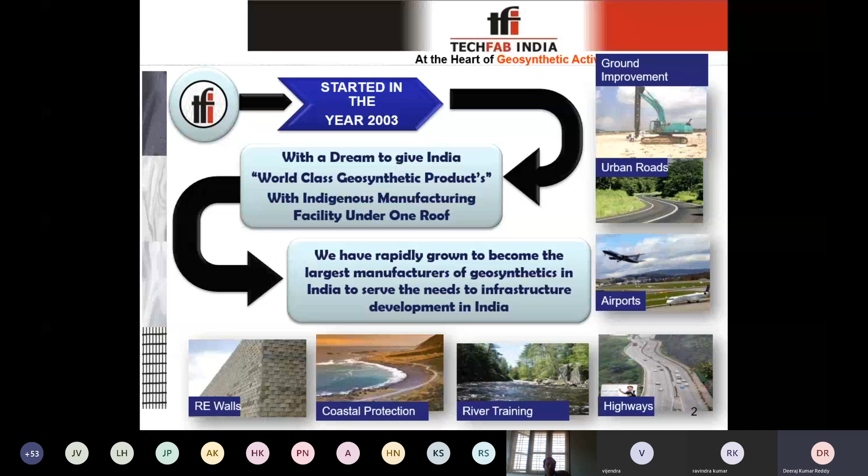I am proud to say that TechFab India has been awarded the best geosynthetics manufacturer of the year 2018. This circular shown here is a screenshot issued by MORTH, where TechFab India has been mentioned as the leading manufacturer of all geosynthetic products in India.

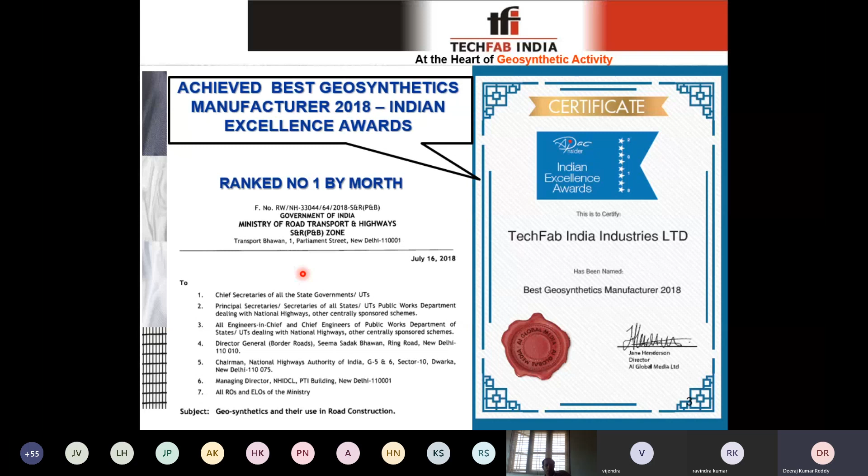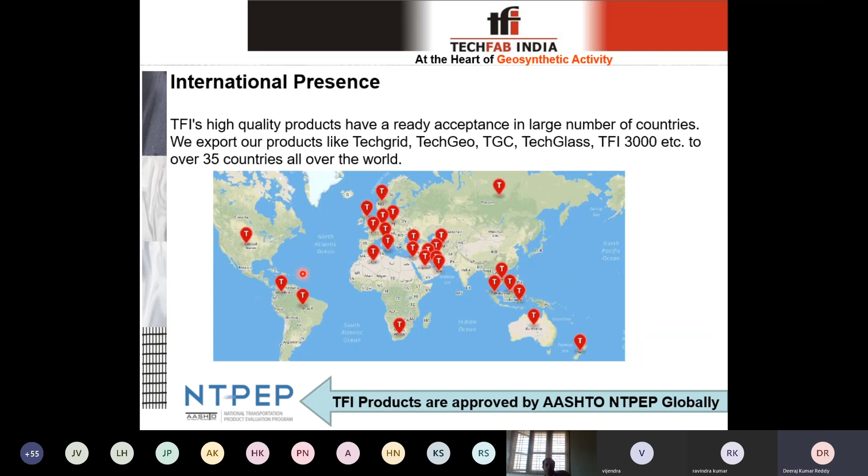I'd also like to remind everyone that we have an international presence. We are exporting geosynthetic materials abroad to 35 countries, and our geosynthetic products are approved by AASHTO and NTPEP globally. So to proceed with today's topic...

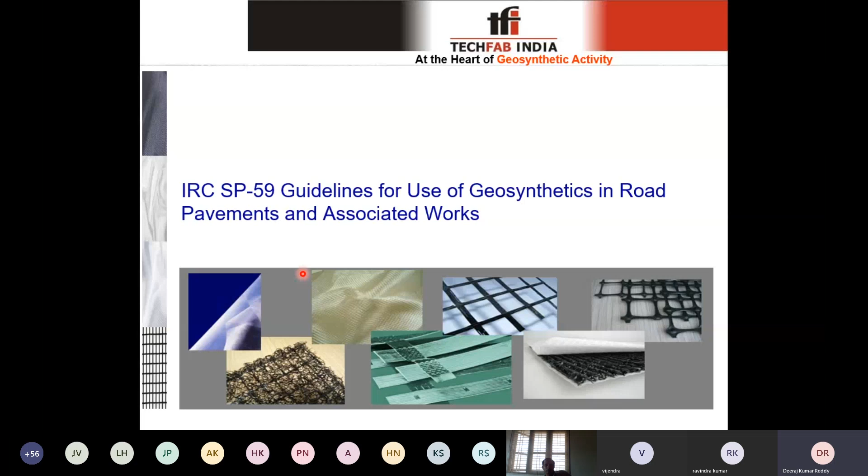GeoGrid reinforced flexible pavements with reference to IRC SP 59. This IRC SP 59 is the guidelines for use of geosynthetics in road pavements and associated works. Though we are exclusively discussing GeoGrid reinforced pavements, I will first give a brief explanation of the mechanism and different types of functions of geosynthetics used in road pavements or embankments, and then proceed with the exclusive design for GeoGrid reinforced pavements.

To start with the functions of geosynthetics, first is the separation function. This applies when you have two kinds of soil—for example, clay soil and a good quality embankment fill to be placed on the clay soil. There is every chance these two soils get mixed over a period of time, which may alter the performance of the embankment or pavement.

To prevent that, a geotextile can be laid between the two layers—between the good quality and bad quality soil—which will prevent the intermixing of these two soils. This separation function is served by non-woven geotextile.

Next is drainage. Drainage is the collection of subsurface water and discharging it into the desired destination. This drainage function is served by a drainage composite.

Next is filtration. Similar to separation, the non-woven geotextile also performs the filtration function—it allows water to pass through while retaining soil particles. That is, just as it prevents the two soils from mixing, it does not prevent water from passing through the different layers; the water passes while the soil is retained.

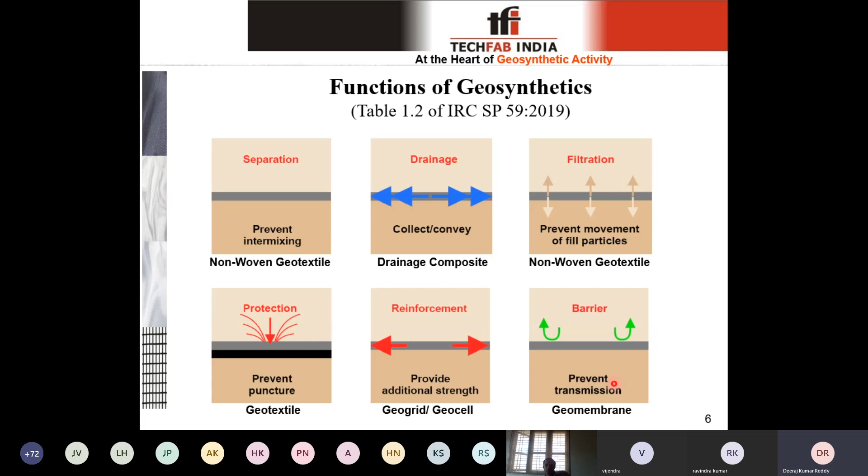Next is the barrier function. Barrier is the prevention of transmission of any kind of material, be it soil or water. In separation or filtration, water is allowed to pass through, but in the case of a barrier, even water will not pass. Especially in cases of capillary rise issues, a geomembrane is used to prevent the capillary rise and prevent water from passing through.

When we talk about geosynthetics in pavements, especially these geosynthetic solutions are well established with all codal provisions, and they are used as an alternative to conventional solutions. The major objective of using this solution is to optimize the cost of a project and to reduce the usage of natural resources like aggregates or good quality aggregates.

Now, when we talk about basic applications of geosynthetics in pavements, to start from the bottom, that is subgrade separation and stabilization. Next is the base reinforcement, that is reinforcing the base layers of the pavement. Next is overlay stress absorption, that is the reinforcement which we use in the overlays in the bituminous layers to prevent reflective cracking. Next is subsurface drainage, that is drainage to be provided in the pavement layers or in the embankment of the road to collect the subsurface water and discharge it out. I'll explain all these applications one by one in a slide.

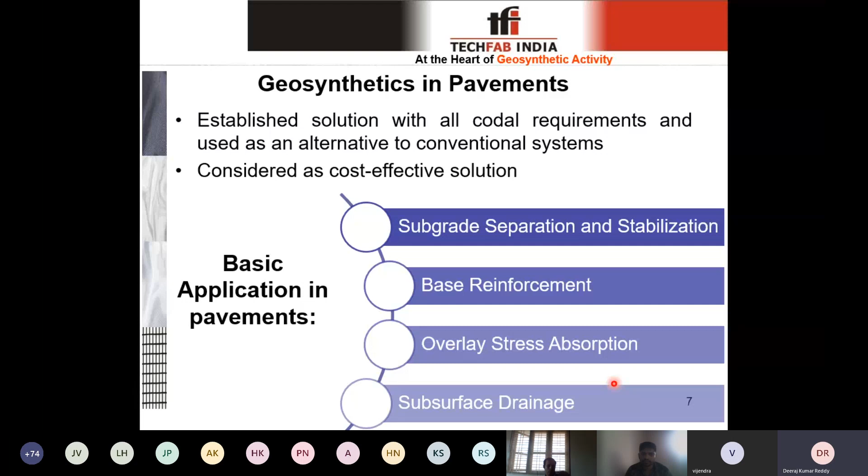To start with separation and filtration function, when you have two soils - one is the embankment fill, which we consider a good quality soil, and a clay, maybe a black cotton soil - we do not want to mix these two soils, because above this we are building an embankment, and over a period of time, if these two soils get mixed, the properties of your embankment fill itself will change, and that may alter the performance or the stability of your embankment.

So in order to prevent that, when we lay a non-woven geotextile separation layer or filtration layer, this layer will prevent the mixing of two soils, and this will allow the water to pass through between the two layers, with which your pore water pressure will not be developed at any layer of the embankment or the ground, and your soils are also not getting mixed. So this is how your separation and filtration function will perform.

Below is the picture of one of the projects where a non-woven geotextile is currently being used. This is the project which is under execution now, where your geotextile is being used to separate and filter before laying the embankment fill.

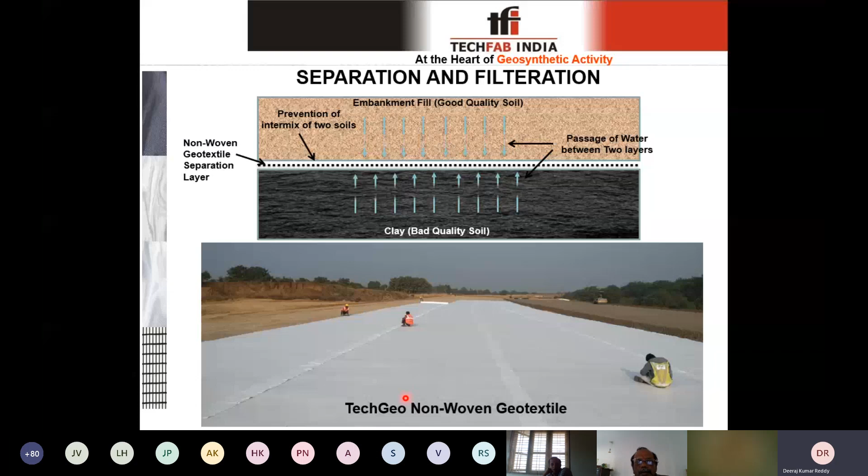Next is the ground improvement. Here I am talking about ground improvement with geocell. This geocell is a honeycomb structure in the form of cells, in which you will fill the geocell with soil or aggregate, and the soil or aggregate in the cells will have the confining effect from all the sides, as shown in the animation.

So when your load is coming from the superstructure or from the traffic vehicles, these loads will be transferred onto the geocell, which is in the embankment at a particular angle. So when it reaches the geocell, due to its confining pressure and stresses developed laterally, this will act as a beam, and it will transfer the loads to the wider areas.

With this, when we reach the ground level, there will be minimized pressures on the existing poor ground. That means there is a difference between the loads that are coming onto the ground with geocell and without geocell. So this is how your geocell is minimizing the pressures or the loads coming onto the poor ground.

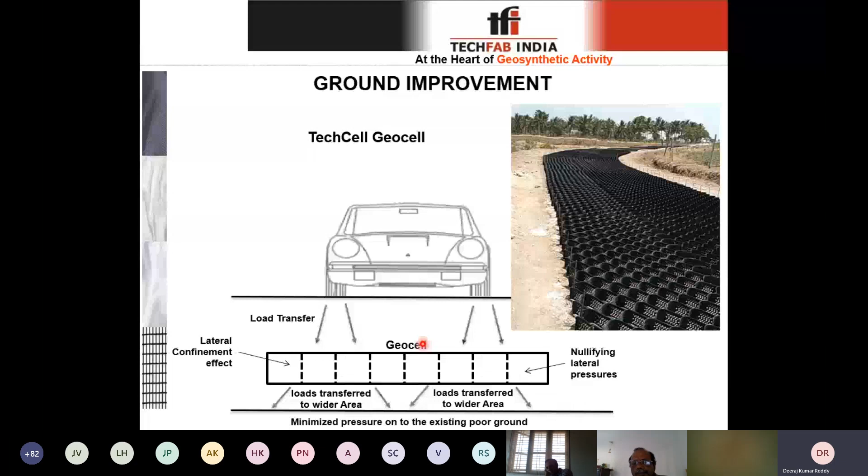Next is the subsurface drainage. Conventionally we use gravel or sand as drainage medium in the embankment, or in case of pavements, it is your GSB layer that will act as a drainage layer.

Now, when we talk about the alternate solution, it is a drainage composite which will have two sides non-woven geotextile - the same geotextile used in separation or filtration functions. There will be two geotextiles from bottom and top, and in between there will be a drainage core. Water will pass through this geotextile and be collected into this core, which will help discharge water to the desired discharge points. This is how your drainage composite will function.

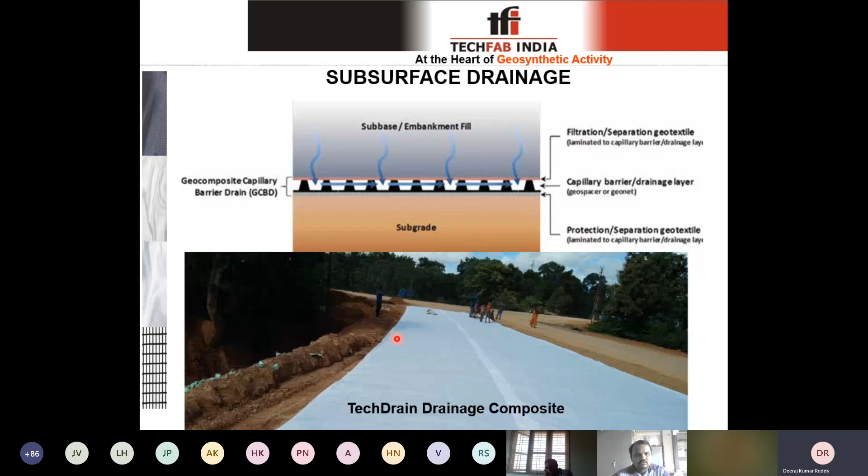The next function is overlay stabilization. This involves using an asphalt interlayer composite made up of glass fibers at the overlay location. That is, when you have an old pavement which is already distressed and you need to lay a new layer of overlay, over time the cracks already present in the old pavement, due to the mechanism of reflective cracking, will propagate upward.

And the overlay which you lay will be of no use after some time. So to prevent this reflective cracking, if you lay an interlayer with asphalt interlayer composite made of glass fibers, this layer will prevent the propagation of cracks to the upper layers, and with this the life of the overlay will be increased.

This is especially useful in case of road maintenance works. For example, let's say a contractor has a road maintenance contract for 20 years. During those 20 years, if a contractor conventionally has to do the overlay maybe 4 or 5 times, with the use of this interlayer he can minimize the number of overlays and reduce the maintenance cost.

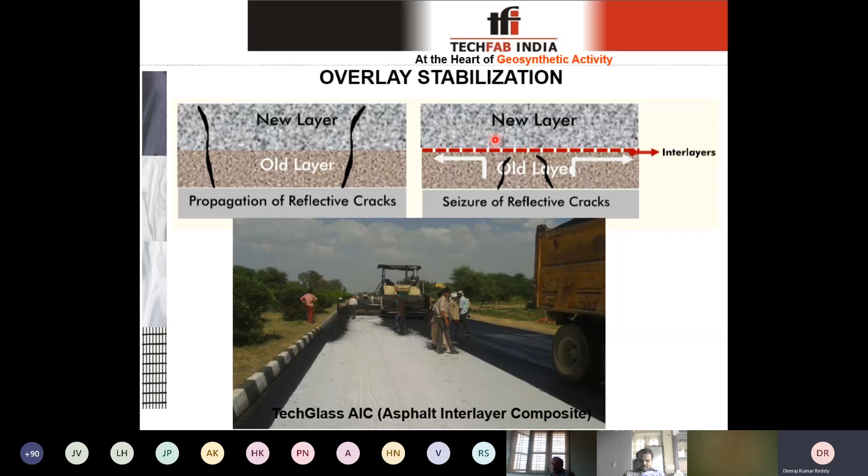Now moving ahead to base reinforcement in flexible pavements using biaxial geogrids, which is our topic for today. Regarding other applications, if you have any queries, we will discuss them in detail, as the topic of today's session is exclusively for base reinforcement using a geogrid.

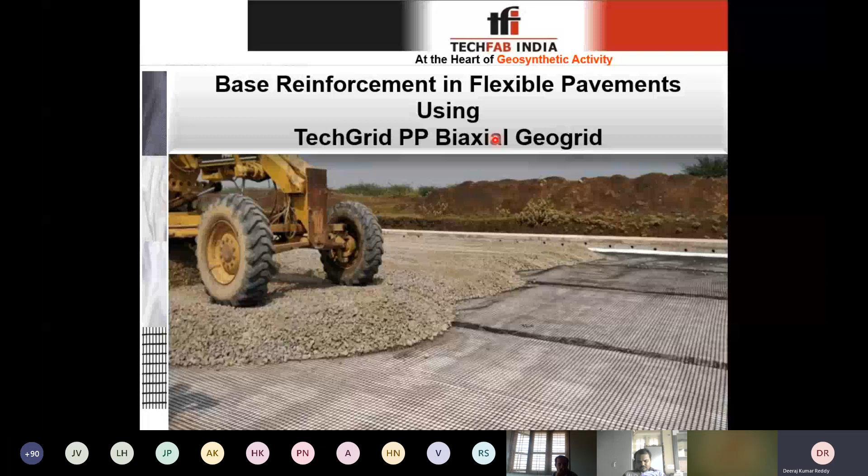Now, when we talk about geogrid reinforced flexible pavements, these solutions are in line with the initiatives of MORTH and NHAI through their circulars to adopt reinforced pavements, which aims to minimize the usage of natural aggregates and thereby reduce the carbon footprint on the environment.

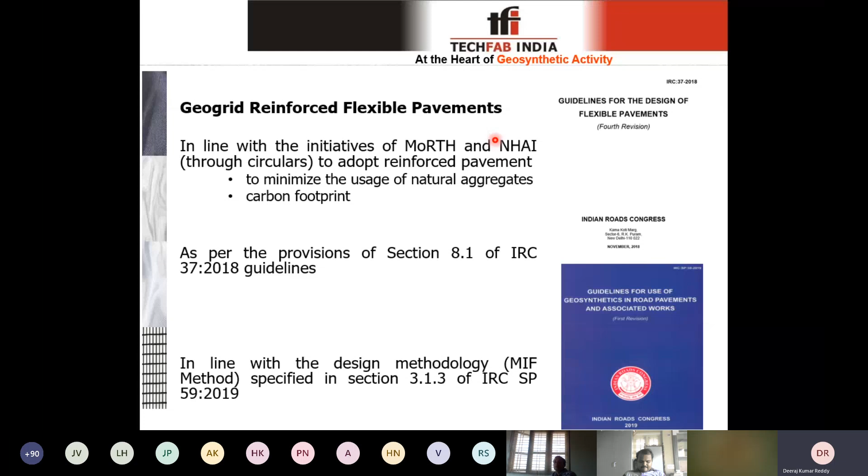These geogrid reinforced flexible pavements are as per the provisions of section 8.1 of IRC 37 2018, the latest guidelines of IRC 37. In continuation to IRC 37, the detailed design methodology and applications of geosynthetics in road pavements are specified in IRC SP 59 also. These two codes are the latest guidelines, released in 2018 and 2019.

And as I said, there are many types of geogrids like uniaxial geogrid or biaxial geogrid. Even in biaxial geogrid, you have extruded geogrids, etc. Now, why we use PP biaxial extruded geogrid for pavement applications is the unique structure that allows the grid to get a good grip on the aggregate particles and results in effective mechanical interlock.

So this is how your geogrid will improve the stiffness of your aggregate layer, and when stiffness increases in the aggregate layer, automatically the modulus value of that particular layer, that is the strength of that layer, will get improved, and the improved strength will be used to analyze the pavement.

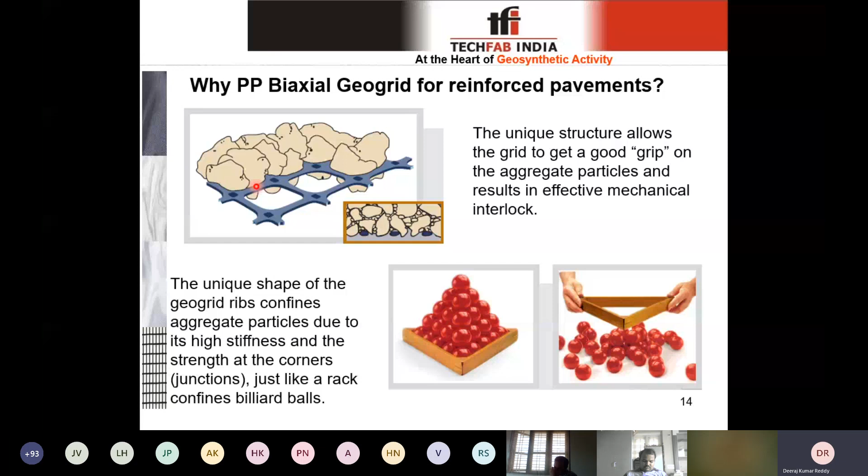So when we talk about the benefits of PP biaxial geogrids in pavements, we have three kinds of benefits. That is three alternatives we can see in the pavements.

One is reduction of thickness. When you have the same kind of situation as conventional pavements, you can reduce the thickness of your pavement layers, either the base layer or the sub-base layer, and get the direct cost benefit of the reinforced pavement. Second is increasing the design life.

For example, in the initial stage of the project, you have analyzed the traffic to be maybe 50 MSA loading onto the road pavement. By the time the contractor executes the work, the loading gets increased to 75 MSA due to various reasons. So during that time, conventionally what contractors or consultants have to do is increase the thickness of pavement and make it suitable for 75 MSA instead of the older 50 MSA.

During that time, there is an alternative: using the PP biaxial geogrids. As you are improving the strength of your pavement layers, automatically your design rutting and fatigue lives, for which we design the pavements, get improved, and the same thickness or very minimal increase in thickness will make that pavement composition suitable for 75 MSA also. This is just an example of how increase in design life is possible.

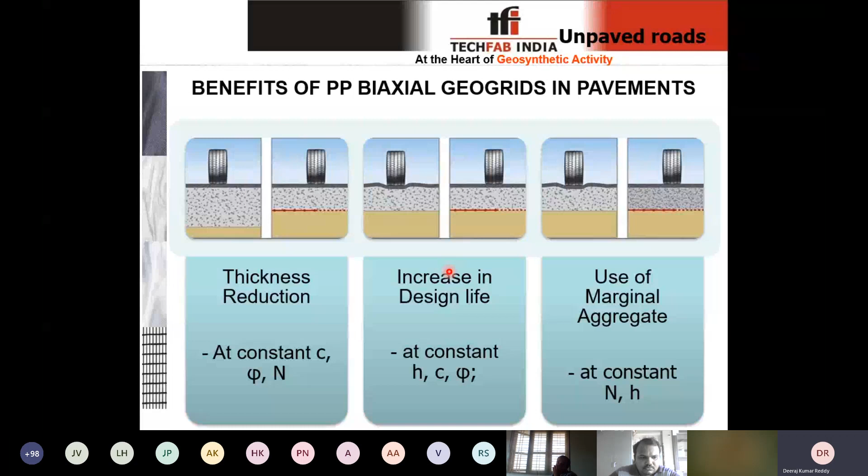Now, when we talk about the design methodology, in IRC SP 59 or the IRC 37 guidelines, they have specified two methods: one is the layer coefficient ratio method, that is the LCR method, or the modulus improvement factor method, that is the MIF method. In this presentation, I'll exclusively talk about the modulus improvement factor method, the MIF method, which is a very simple method compared to the LCR method.

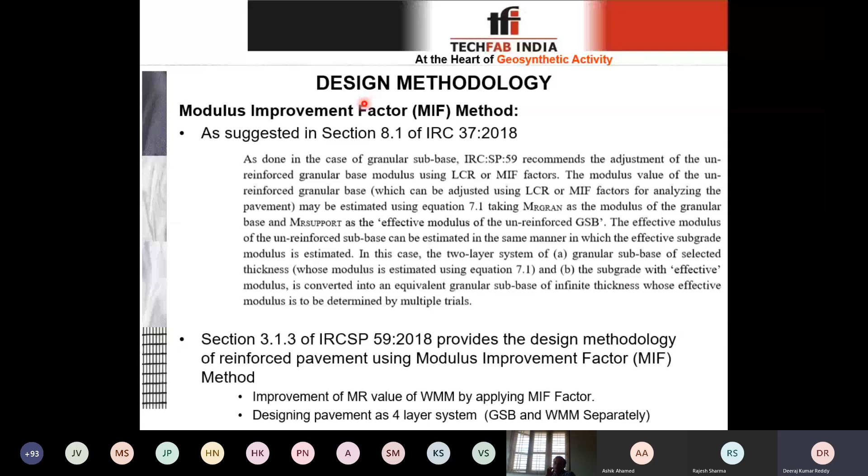But when you come to reinforced pavement, you are including a reinforcement in any one layer, either base or sub-base. So you cannot consider both base and sub-base layers as the same and design in this case, because you are changing the characteristics of one particular layer. That is why IRC 37 or IRC SP 59 says that for reinforced pavements, you need to consider four layers: BC plus DBM combined as one layer, WMM separately as base layer, sub-base separately as one layer, and subgrade as one layer. This is how IRC 37 recommends designing reinforced pavements.

So the step-by-step procedure for the design methodology is: first, determine the effective CBR of the subgrade. IRC 37 recommends the procedure for determining the effective CBR. You have the existing subgrade or existing soil with a certain CBR. Above that, you compact 500 mm thick good quality soil having a CBR of more than 8%. The combined or effective CBR of these two layers is used for the design of the pavement. This is the step of determining the effective CBR.

Once your effective CBR is determined, you will consider some trial thickness of the reinforced pavement. Basically, these pavement designs are totally based on the trial and error method. You consider a certain thickness of pavement and check it for fatigue and rutting strains.

If they are safe, you adopt it. If they are not safe, you improve or you increase the thickness. That is how you design the pavement.

So the same way here we will consider trial thickness of reinforced pavement, and then you determine the modulus values, that is resilient modulus of each layer: subgrade, GSB, WMM and BC and DBM combined. As I said in the earlier slide, here we are considering individual layers, and IRC 37 gives one formula for determining the modulus of granular layers. I'll explain that in the next slide.

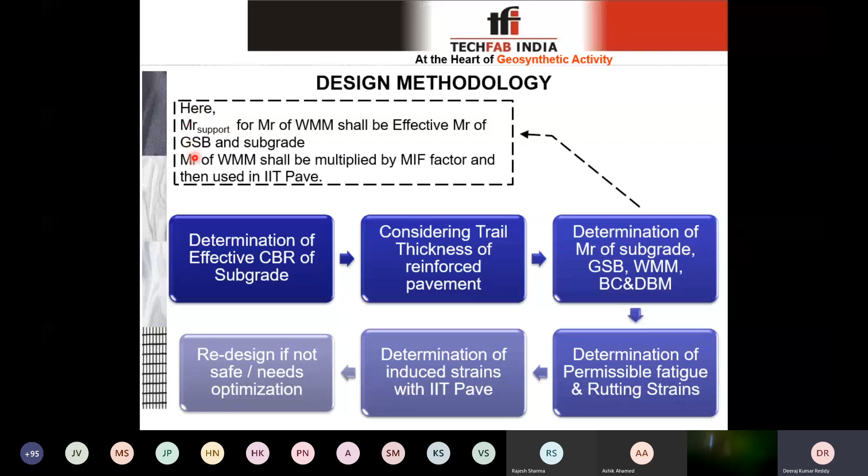Now I have told about determination of MR values. So when we talk about the resilient modulus values, that is the strength characteristic of each layer of pavement, starting from the subgrade, depending on the effective CBR of the subgrade, we will determine the MR value.

And then when we talk about the resilient modulus of GSB, that is the layer above the subgrade, this is the formula that IRC 37 gives, which is dependent on the thickness of your GSB and the MR of your underlying layer, that is the subgrade layer. With this, you will determine the resilient modulus of GSB.

Now when we talk about the WMM, the same formula will apply, and here H will be the thickness of your WMM layer, and MR will be the MR of the supporting layer. Here the supporting layer is GSB only, but you should not take the MR of GSB directly. Instead, you should evaluate the effective CBR, effective MR of this GSB and the subgrade soil.

This is because the stresses induced onto the WMM layer will be transferred to the subgrade also. So to evaluate the strength, you should not consider only GSB as the support for WMM. Your subgrade is also the support. So with this, you will determine the MR of support first, which is the effective value of your GSB and subgrade, and using this MR you will determine the MR of WMM.

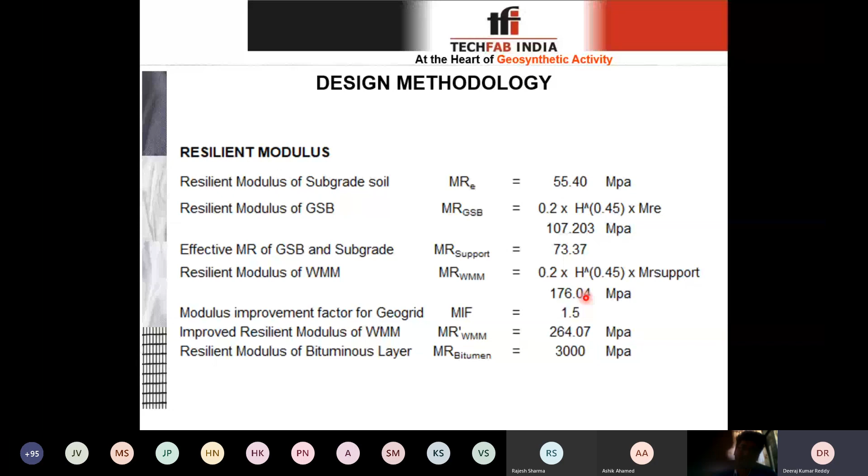When we talk about the cost comparison in this particular case, on an average, you will be able to save directly 10% cost of your pavement.

This cost saving will be further improved if your CBR is going down. That means as your CBR goes down, your improvement factors get higher, and higher improvement factors lead to higher cost savings, because at very low CBRs, the conventional thickness of your pavement is very high.

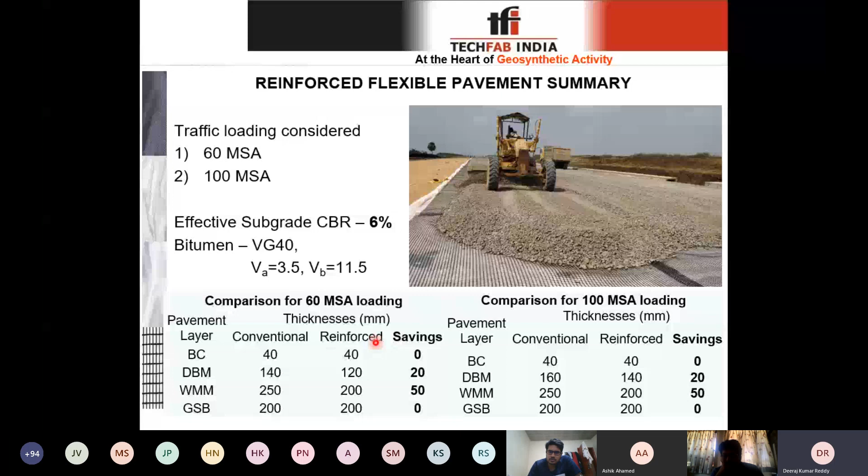I am not talking about the cost analysis here, because this varies for each project depending on the cost of your pavement layers and the location of the project. If a particular project needs a cost analysis, you can come back to us. We will provide you the designs for these GeoGrid reinforced pavements, and you can analyze them with your project's cost.

Now, regarding the compliance of these biaxial geogrids, the technical specifications for mechanical and endurance properties are specified in section 700 of MORTH, that is table 700-7 of MORTH specifications. The same table is also given in IRC SP 59, and this is the extract of IRC SP 59 which I have placed here. The same table is there in MORTH also.

The predominant factors in this table are the tensile strengths at 2% and 5% strains. Generally, in regular geogrid reinforcements, you consider the ultimate tensile strength or long-term design strength of your reinforcement. But in this case, since you need stiffer geogrids, the predominant factors are the strengths at very low strains, that is 2% and 5% strains.

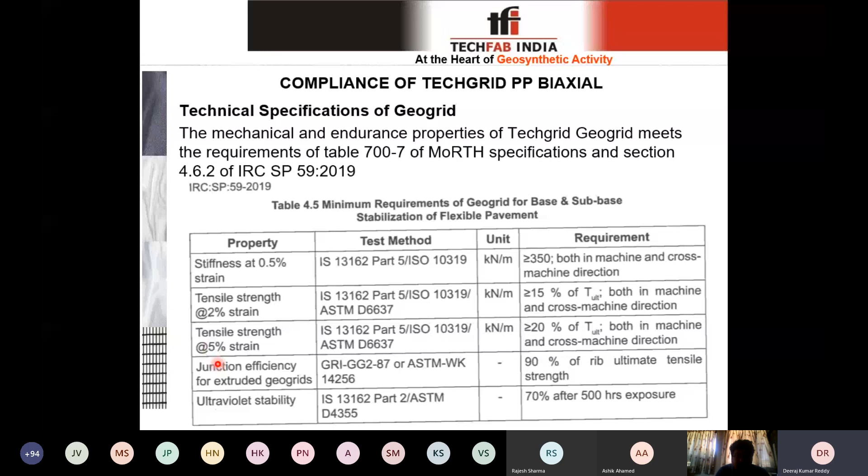Next is the junction efficiency of extruded geogrids. MORTH or IRC specifies that these junctions should have a minimum 90% strength of your ribs, that is the tensile strength of your geogrid. Conventional geogrids used in reinforced soil walls or embankment stabilizations do not have this junction efficiency, because their function in that application is different from pavement reinforcement.

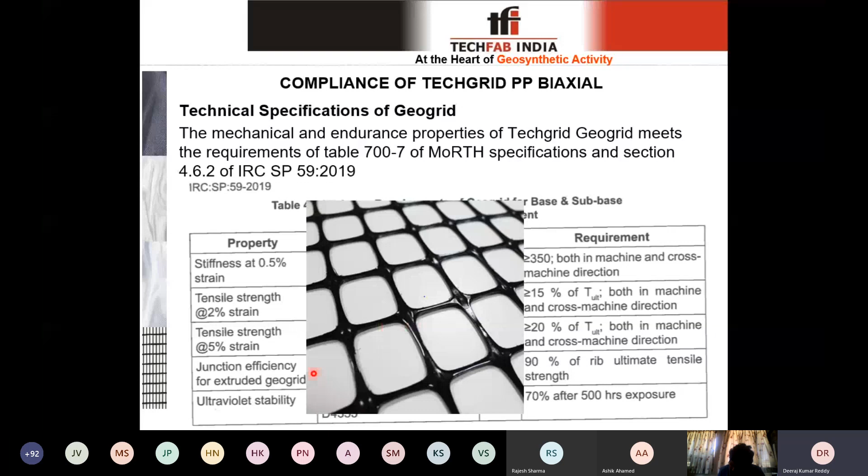Next is ultraviolet stability, which is one of the endurance properties of the geogrid. Sometimes when incorporating this solution at the DPR stage, consultants preparing the DPRs require SORs supporting the geogrids so the same can be incorporated in the DPRs. This biaxial geogrid is included in Maharashtra SOR and Delhi schedule of rates; these are the extracts of that particular item from Maharashtra SOR and CPWD SOR of Delhi.

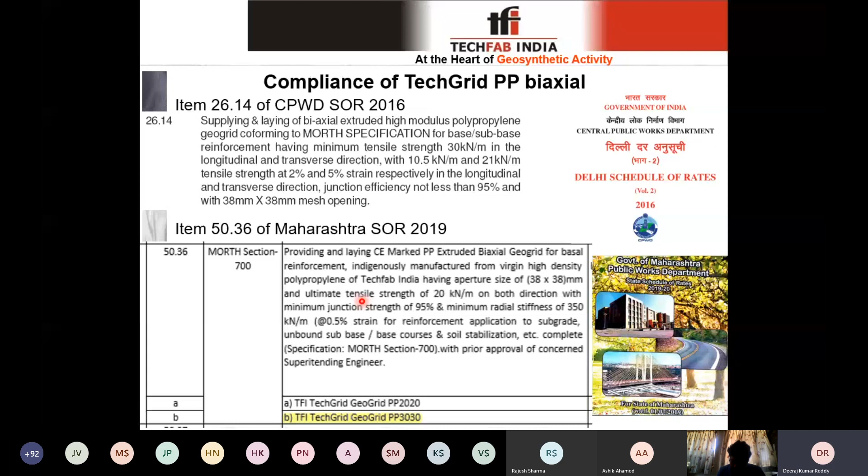Regarding the product testing.

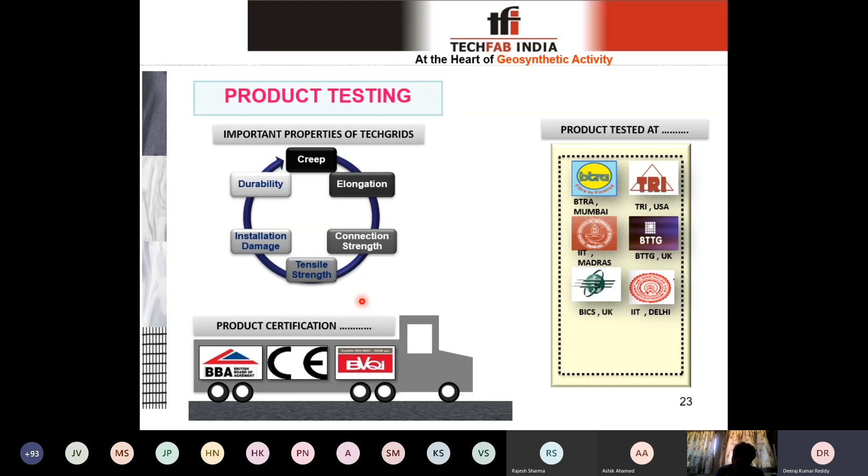Techfab India's products are in-house tested with GAI-LAP and NABL accreditation of all our laboratories with ISO 9001:2015 certification. We have also tested our products at various IITs, and at Bombay Textile Research Association in Mumbai. For export purposes, we have accreditations from TRI from USA, BTTG from UK, and BICS from UK. These are our product certifications for the technical specification of the product.

When we go to the installation procedure of the geogrids in pavements, first is unrolling of the biaxial geogrids. These geogrids come in rolls. First step is to unroll at the desired location as per the markings. Second, when unrolling the adjacent rolls, these geogrids come in approximately 4-meter width rolls, covering 1 lane width, and you lay the adjacent rolls ensuring an overlap of 100 to 150 mm.

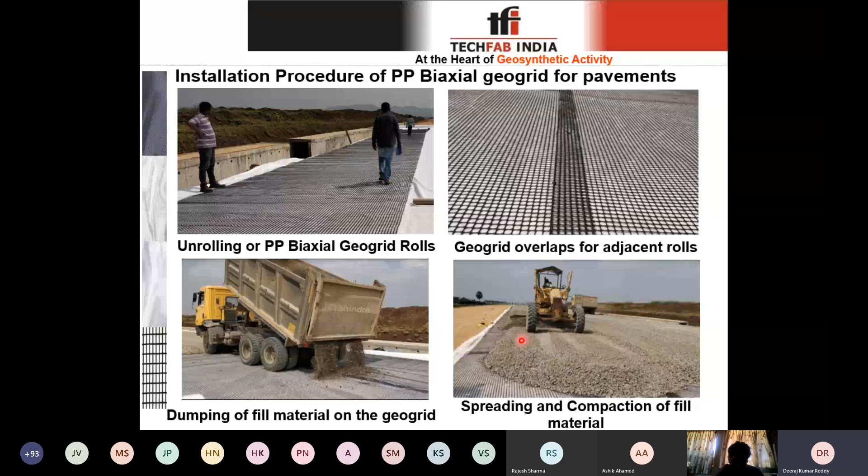Once the geogrids are unrolled, we start dumping the fill material on the geogrid, which is then spread and compacted as per the desired thickness. This is the installation procedure for the geogrids. You do not need any specialized equipment or machinery to install these geogrids—it's the regular machinery used at pavement construction.

More than 10 lakh square meters of biaxial geogrids we supplied last year in various highway projects in Gujarat itself. Apart from these, Techfab India has totally supplied around 30 lakh square meters of geogrid for various state, national highways and PMGSY routes. This has drastically improved after the publishing of IRC codes like IRC 37 or IRC SP 59.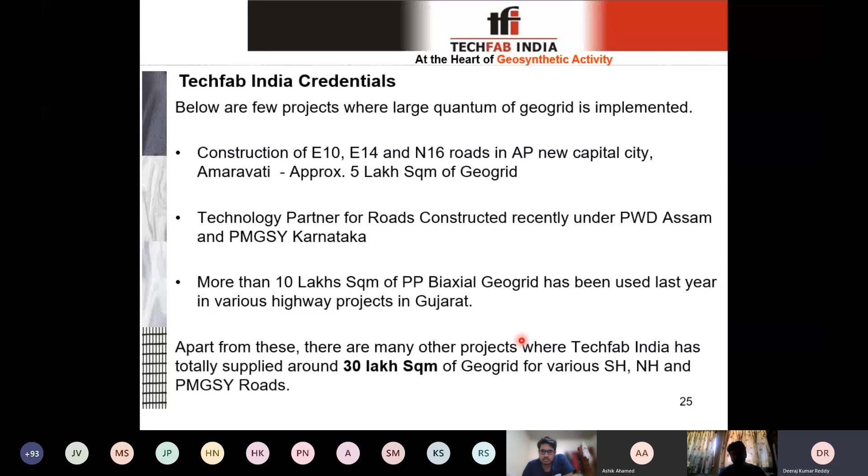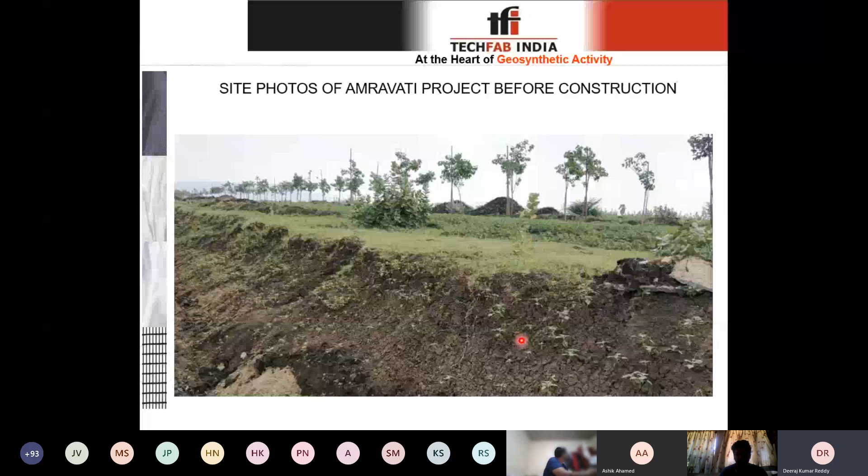These are some site photographs of the Amravati project which I just discussed. This is the photograph of the site before construction. Here you can see it is purely black cotton soil, a very weak soil underlying the pavement, which was excavated to the desired levels of the pavement. And these are the rolls of the geogrid.

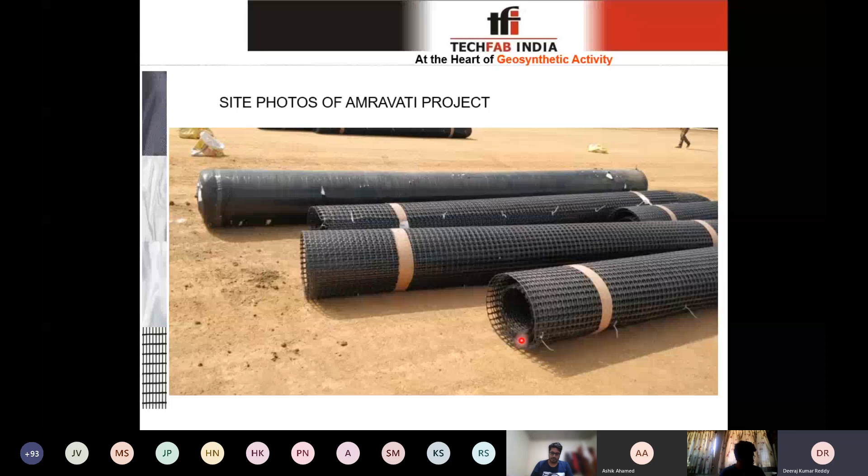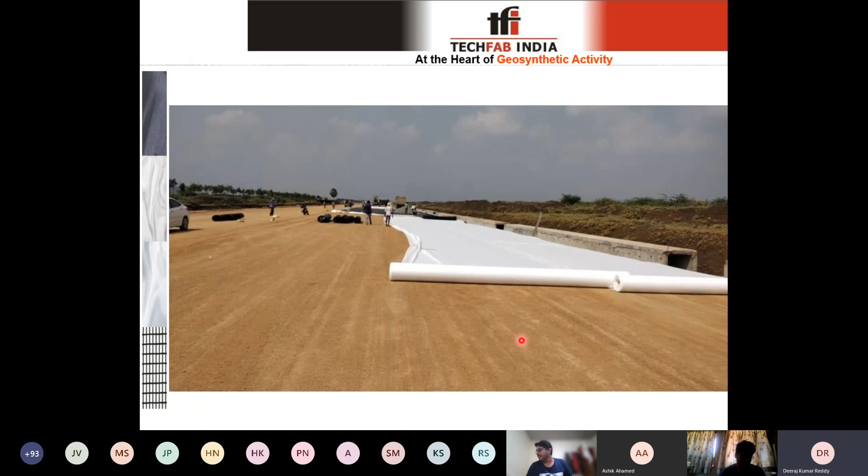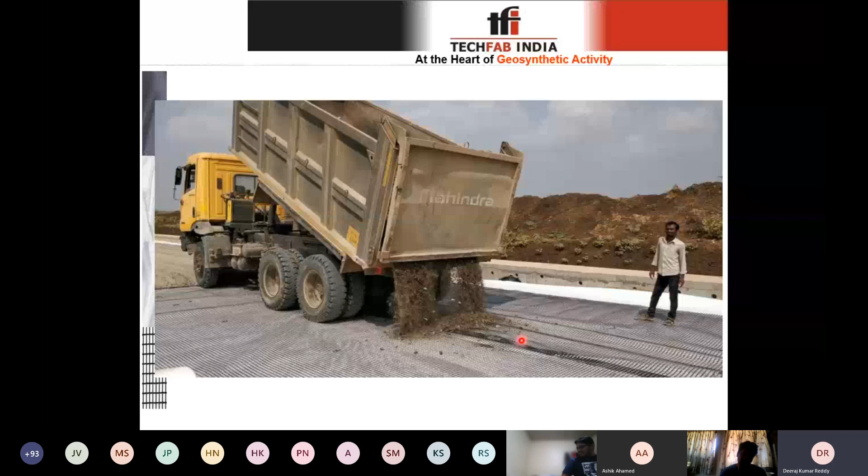Here, as the objective was also to separate the layers, they used geotextile apart from the geogrid. This geotextile was used as a separation and filtration layer. So this is unrolling the geogrid, this is the overlap for the adjacent rolls, then the dumping process, then spreading and compaction of the aggregate layers.

To conclude, reinforced flexible pavements are technically superior and economical compared to other conventional flexible pavements. These geogrid reinforced flexible pavements comply with initiatives of NHAI towards minimizing use of natural aggregates and reducing carbon footprint on the environment. The design methodologies and material specifications are included in IRC and MORTH standards and various SORs also.

TechGrid PP biaxial geogrids—the improvement factors, which is the most crucial thing in design of reinforced pavements—have been certified by IIT, and the technical parameters of the geogrid have been certified by Bombay Textile Research Association, that is BTRA. TechFab India, complying with the Make in India initiative of the Government of India, manufactures all geosynthetic products from geotextile to geogrid, geocells, etc. in India only under one roof, with the highest manufacturing capacities to supply huge quantities in very short periods as per project requirements.

We have ISO 9001:2015 certification, and all our manufacturing and testing labs have NABL and GAI-LAP certifications. We provide engineering and techno-commercial assistance to all stakeholders, right from the inception of the project to completion.

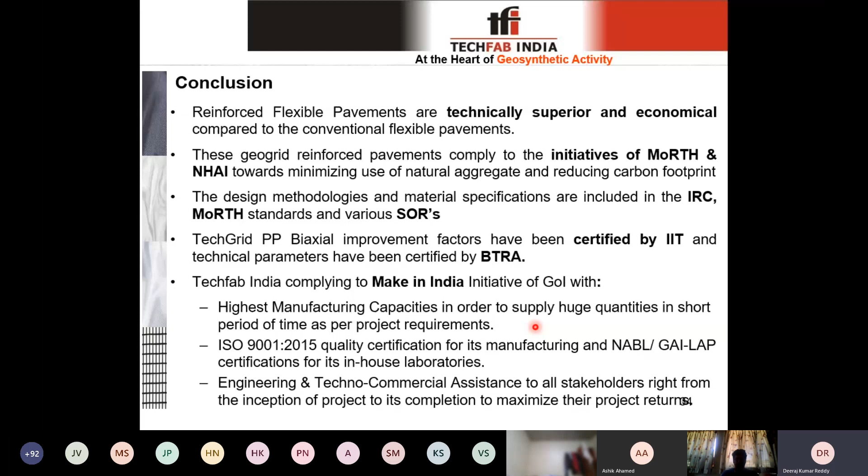So this is regarding the geogrid reinforced flexible pavements from our end. As I said earlier, for all your queries through this session regarding any applications—because I have discussed only about reinforced pavements, apart from that I have briefed about ground improvement, separation function, overlay stabilization, and subsurface drainage—if you have any query regarding any application, you can contact us.